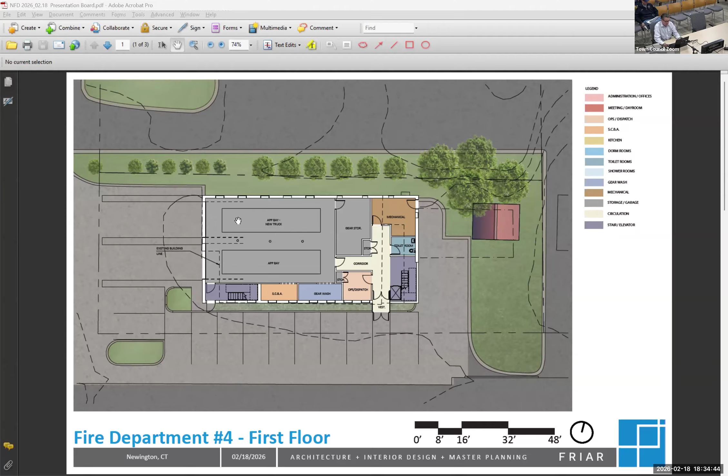Bear with me here a moment. So this is a revised version of the plan, also showing some of the site developments in the background, which we will get to. We've added in a second stairwell.

In this area towards the front of the building, we squared the building off. We've moved gear wash and the breathing apparatus directly off of the bays. We've combined the gear storage, which came out of the last meeting as well. We had separate storage rooms; we've combined that into one larger room, so we can have an area for lockers, for our workbench, and storing of other equipment in there as we design that.

Still one large mechanical room towards the rear with access from the exterior, single user toilet room on the first floor, and your ops and dispatch. So the two stairwells in purple going to the upstairs.

Here we have straightened out the male dorm room, and we've combined the shower and toilet area, same with the female shower and toilet. We've moved the female dorm over to the corner, so those areas are accessible directly off the corridor. We have one large shared storage room, elevator and stair. In this corner, we have lieutenants' and captains' offices.

We've moved the kitchen over towards the exterior wall. We've made that a little larger with a wraparound counter and a counter pass-through here as well. And direct access from the day room downstairs, which on the first floor could take you directly to the exterior, or you can go into the bays themselves.

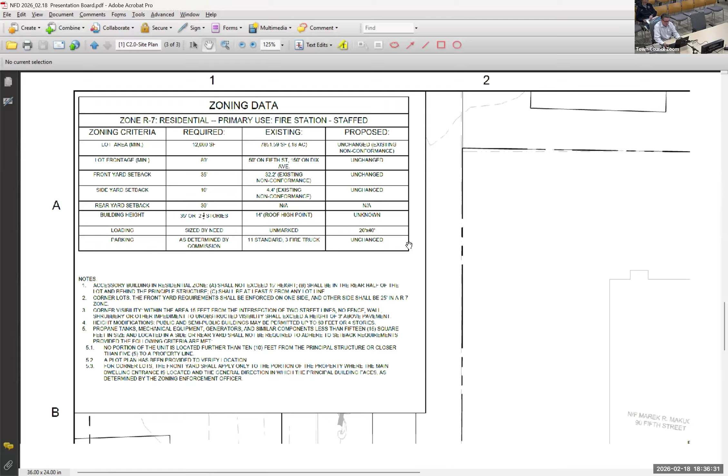On the exterior, Dinesh has been working with our building plan. So we're showing 12 parking spaces at the exterior of the building, a little bit of landscaping up close to the building and also as a divider towards the corner of the site. We've extended the apron, so we've got enough room to pull trucks out in front of the bays.

Towards the rear, we had the secondary access into the mechanical room towards the back. We've got areas here for dumpster, keeping the shed and the lawn areas where they are right now is what we're proposing. We've got an area for outdoor sitting and some raised planters along the edge of the building in case we wanted to pull in some vehicles or other equipment close to the building. And then we've got a lane here for the dumpster pickup, and of course our main entrance to the building, which is striped off, which will take you right into the operations area.

With that, if anyone has any questions, comments, would like to talk or see anything else. Yeah, I'll open it up to the committee. Actually, Tom, do you want to go first, LaPierre?

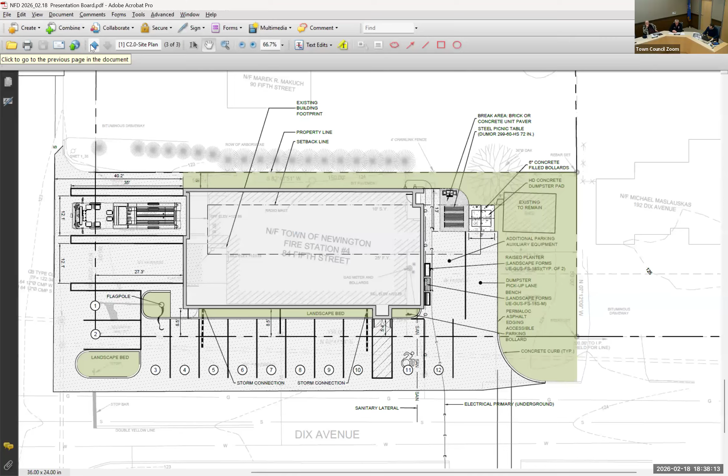Yeah, on behalf of Chief Trommer, in our discussion today, he was very pleased working with Bob. And I believe all of the issues that he had have been addressed, and he was very happy with the plan as we spoke this morning. Looking at it, it does look like much better flow, I believe. And I think moving the gear wash and SCBA right off the bays, that's a positive move, and squaring that building off. So I think it looks good.

And this is really my first big look at this project. But like I said, in our discussions this morning, he was very, very pleased with working with Bob, and happy with the outcome. Thank you.

The chief did have a couple of follow-up questions, but I think there was more to do with the MEP narrative we had put together to give to the estimator. So we're having our engineers follow up on his questions.

And the next steps of this whole development would be to make any other tweaks to the plans as we see here. Then we would do a building massing. We would also do some initial elevations of the building.

We're expecting to hear back from our estimator towards the end of the week with his first blush at the numbers. So we could take any revisions that come out of tonight and with the next steps of looking at the exterior of the building, and then we'll be looking towards our final by your next meeting, I'm thinking we'll have our final crack at the estimate and any final plan changes.

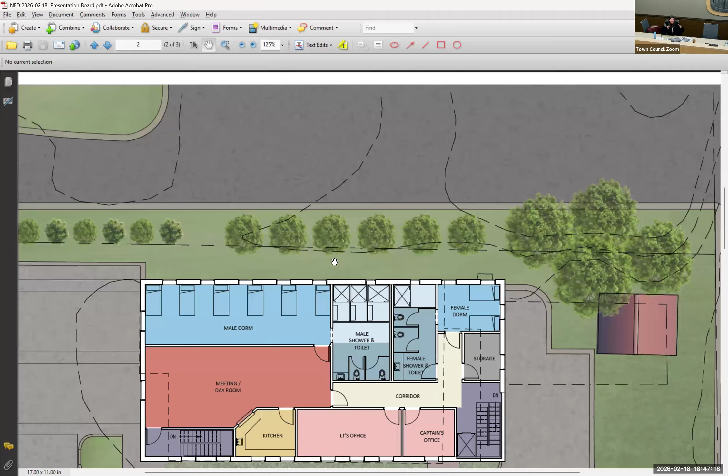Excuse me Steve, I just have a quick question. I know some firehouses have male, female dorms together, and in the dorm itself each has a door, their own little room - I'm gonna equate it to like a college dorm. You have that suite area, and then there are rooms off of it, instead of having a male, female dorm. Within this suite area, this room, there are rooms inside with a locked door and a bed and everything. Is that something... because then they would gain a little space, more dorm rooms, in case there's 4 females where we only have spots for 2 here. This way it might be a little easier if there were more females. I don't know what the ratio is.

The first iteration of the design showed, almost in the male dorm, a separation of spaces just so there could be more private compartments, and it was requested that those walls be taken out. If you wanted to put all the dorm areas together, you'd have to kind of have a suite of dorms lined up. You'd almost want a central entrance and then shower and toilet rooms on either side for male, female, which wouldn't be as efficient as having all the plumbing in one location. It's something we could explore - it'll be challenging with the building footprint, but it's something we can definitely explore.

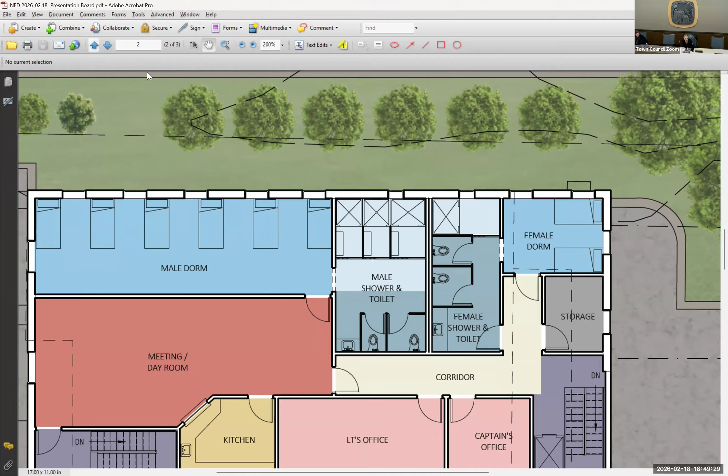Anything else, Teresa? No, I just have one more quick thing. In the apparatus bay, you have those 3 circle drains - most recent firehouse plans I've seen use trench drains. Is the circle drain what you put in? Oh, those aren't drains actually, those are columns, for the big bay spacing there.

I'm sorry Ken, for the minutes, can you say that question again? Of the circles, I didn't know what they were. What are they? Those are steel columns holding up the structure, not floor drains. I can understand why you'd think that - it does look like a drain.

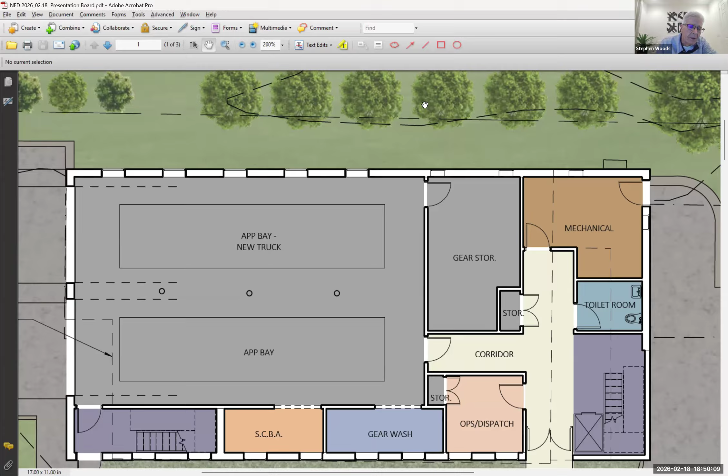If hearing no other questions or comments, Bob, thank you very much. I think you were listening very closely to all the requests we gave you at the last meeting, and you're almost there. Maybe a few little tweaks, and you'll have to make sure everything fits when you start speccing all the mechanical equipment out - maybe a little bit of additional tweaking - but the bay looks much better with the two trucks and the two bays aligned. I think that's gonna really improve the efficiency of this new building for the fire department.

Agreed. Thank you. I'm sorry, are we going to discuss the MEP proposal tonight?

Well, we can, if there's any questions you have on it. So I do have a few. Yeah.

I have a concern that this MEP plan was a copy and paste from some other project, which causes me to wonder if the specifics of it are appropriate for our project. Twice in the report, it makes reference to utilities coming off of Tunxis Road. I don't know where that is. It mentions a specific IT room with specific HVAC specifications for it. It talks about a specific first floor main electrical room. It talks about a training room and all sorts of equipment for that.

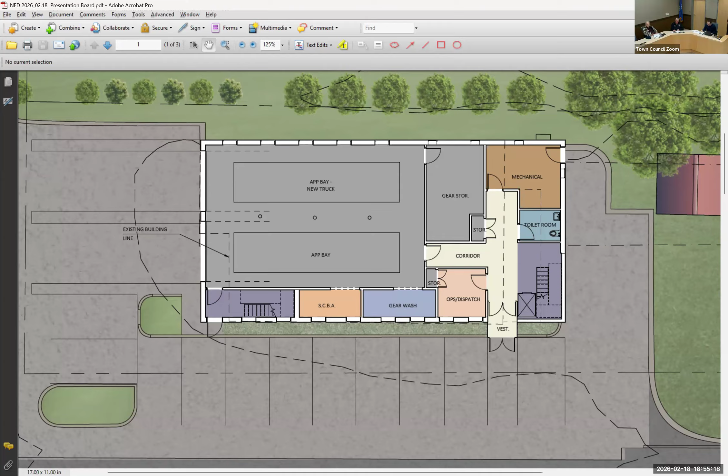That's great. Okay, great. Thank you. Once we have any initial reports back from Environmed, we'll make sure that information gets reflected in the initial estimate for the building, if there's any potential work there.

Okay, thanks, Bob. And Jonathan, there's nobody in the room looking to speak for public? John, did you want to say? No, I don't think so. Okay. Back to comments by committee members. Anything, anybody?

Okay, the only thing before I adjourn, if Bob, you're not going to have it ready by the 26th for that Thursday, we probably should cancel that meeting. And go over, the next meeting would be Wednesday, March 18th. Is that all right with everybody? Sure.